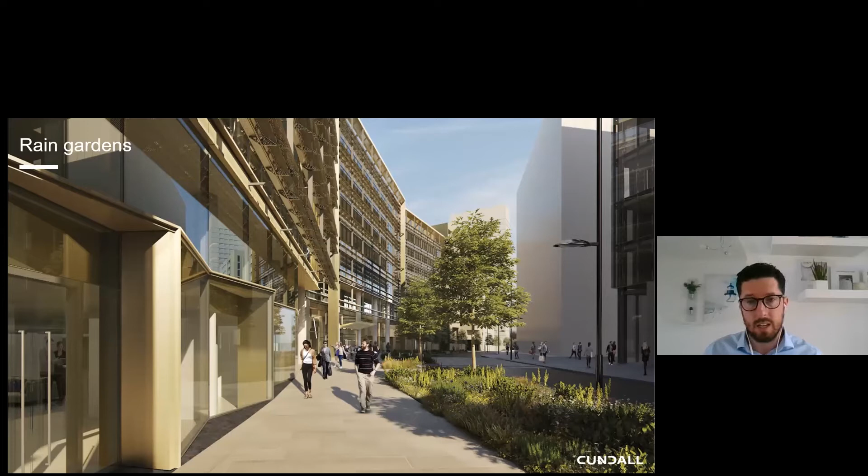Rain gardens are a very simple feature. They can be used in open spaces or in very tight controlled areas, and are simply a depression in the ground where surface water can overland flow into them, or you can direct rainwater downpipes from your buildings into them. They're typically planted with a variety of hardy species and can be really quite attractive features.

Attenuation basins are typically thought of as just big holes in the ground, but they don't have to be. You can incorporate attenuation basins into your landscape and make them very attractive and very usable spaces for the end user. These largely remain dry for the most part, but may have a little channel in the center of the basin to pick up that low flow of water.

Swales are another aspect, not to be confused with attenuation basins, as I sometimes hear. Swales are primarily used for collection and conveyance of water, and they can take very simple landforms in the landscape. It's a simple V cutting here, and they can be planted with a simple verge and maintained as such, or let grow wild, or you can introduce some enhanced planting to really up the visuals. They can be incorporated with underground systems to really enhance the function.

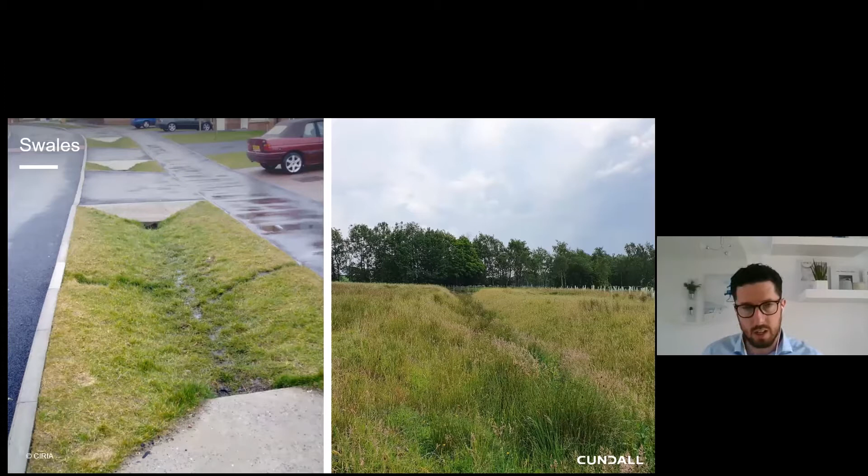Ponds and wetlands are permanent water features and have obvious benefits for water volume control. Plus, they also add a huge amount of biodiversity and amenity uses for the end user.

Integrated constructed wetlands are a bit more specialized. These are typically provided in areas where there's an existing pollution problem or an effluent discharge into an area that's near wetlands. Basically you're enhancing these areas through engineering solutions, natural systems, and soils, so that the inherent systems allow the degradation and capture of these pollutants before it passes on downstream.

Another thing we want to point out on water use in developments is that water really should be looked at as a commodity. Every year, huge amounts of resources are directed towards sourcing, treating, and supplying high quality potable water to our developments. But when you look at what it's used for, a high amount of water goes towards uses that don't need that level of treatment. And the traditional approach to development was to direct the wastewater as quickly as possible to the sewer and away from development, often paying the same supplying company to take it away.

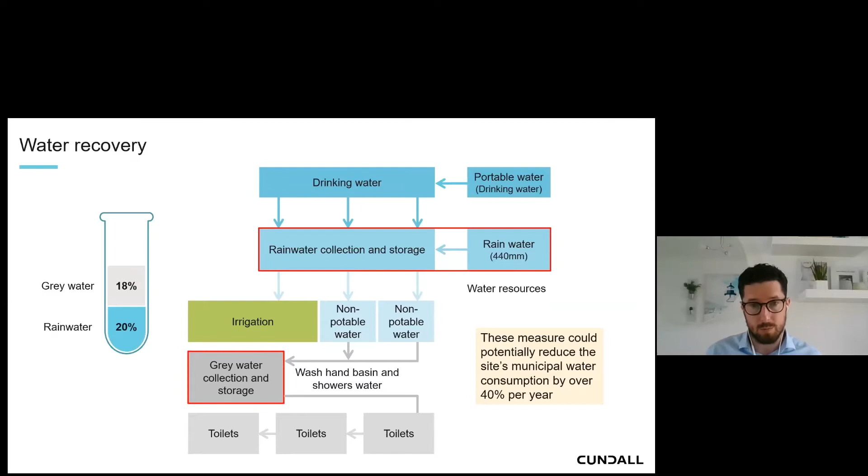Other benefits for blue and green infrastructure is the amenity provision. So we're providing more green spaces for people. They're more attractive, more well-being aspects, and also it can provide for food production.

So why is blue-green infrastructure on the agenda? Many of you may have tuned into some of our previous webinars, particularly last week's on climate resilience. And from the discussions about that, you can see that through climate change, flooding is just going to increase into the future. Studies and results of data collection over the last few decades have shown that it's getting wetter on average. The Met Office in the UK has recorded that the last decade is 1% wetter than the previous 2 decades and 5% wetter than the previous decades before that.

The UN's Intergovernmental Panel on Climate Change has projected that the UK's storm intensity is going to increase 10% year on year up to 2100. And this obviously has other implications, particularly when sea level rises are occurring as well. In the UK, the sea level has risen by 17 centimeters in the last 120 years.

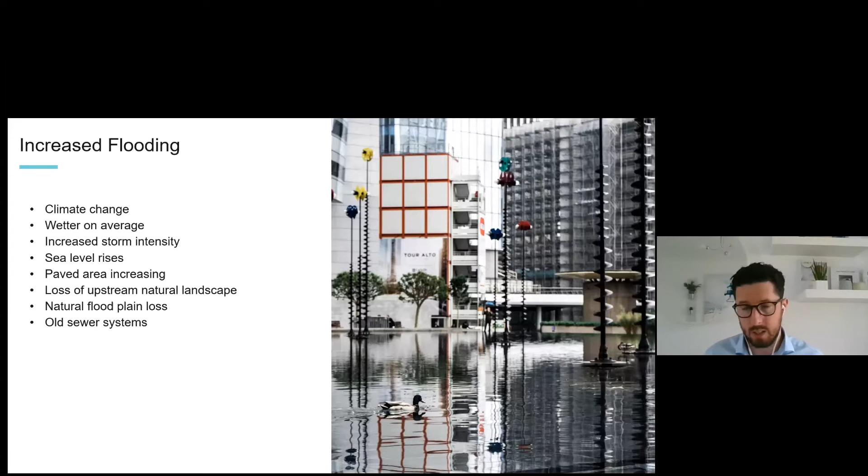Also, we've got an increase in drought and water stress. So in the UK, we're seeing hosepipe bans quite regularly occur now. In Australia, there are areas that used to have drought occur once every 20 years. Now certain areas are almost in constant drought. And this has been shown earlier in the year by Australia's terrible wildfires.

Also, it's been long recognized that our cities are being overpaved, which is interrupting that natural water cycle, preventing that natural infiltration into the ground underneath the city areas, and this is having a number of effects. So it's interrupting the replenishment of the groundwater aquifers. It's also drying out soils, and certain soils then shrink, and this has big impact on foundations in places, but also can actually contribute to the whole city area actually sinking.

Biodiversity is another big problem, and it's an increasing problem across the globe. Extinction is being talked about heavily for a lot of animals. In fact, in the UK, 15% of species are threatened with extinction. This is also compounded by a general reduction in the abundance of all species out in the environment. And another thing is the bee population collapse has been widely reported, and this is a huge ongoing problem. In fact, the bee population has dropped by a third since 1980.

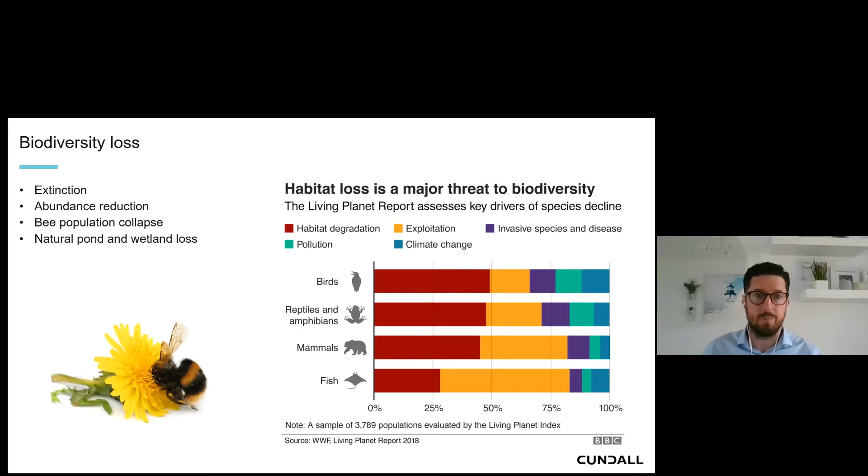Air pollution. The WHO considers air pollution to be the greatest environmental risk to human health, with over 90% of the human population living in cities where their health guidelines are being exceeded. And in the UK, this contributes to roughly 40,000 deaths, and also adds about £20 billion of cost per annum.

But actually, good news: in developed countries, air pollution has generally been on a decline. There are still problems in the cities, where NO2 and PM levels remain high. Developing countries are struggling with this, and these problems are being compounded by the increase in hot and sunny spells, which stagnate the air, hold it in the cities, and add to the general air pollution.

And then we've had the increase in wildfires, as I mentioned earlier. So there are days where smog is blowing across the cities, causing real problems for people with respiratory illnesses. Also, the general heat of cities reacting with these air pollutants can have the effect of increasing ozone.

Contamination in the environment. So we are aware of contamination in the environment. We're particularly aware of historic contamination from industrial sources, mainly in the form of hydrocarbons and oils. Plus, recently, we've been made more aware of how plastic is impacting our environment.

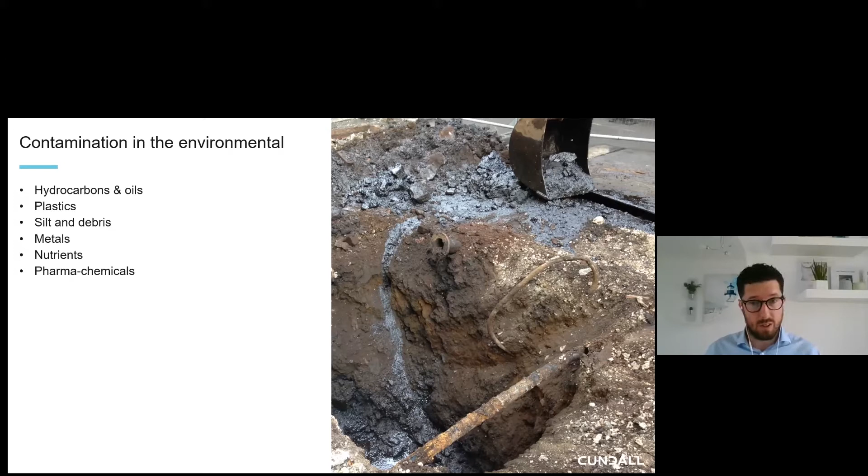There still remain a lot of other contaminants that we don't really think of. Silts and debris being washed downstream very quickly can have big impacts on certain areas. Heavy metals get washed off our roads from cars, etc. Nutrients getting into the water courses can have a big effect. And pharmaceuticals are now being understood to have quite a large effect on wildlife.

Urban heat, another big problem. Our cities effectively have their own local mini climates; London, for example, has recorded an average of 1 to 3 degrees warmer than the surrounding countryside. And this is mainly influenced by a number of factors.

Basically, sunlight has an uninterrupted path through to our cities. When it hits surfaces there, we have metal surfaces that heat up quite quickly, concrete surfaces that store heat and release it back slowly, and glazing that traps and amplifies heat. So there's a lot of heat being provided just from the natural environment.

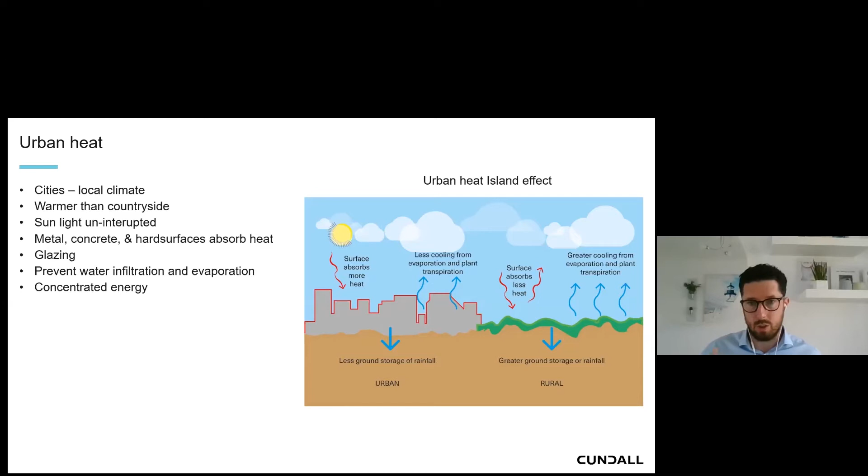Plus, overpaving prevents water infiltration, and there's the loss of evaporation effects, so there's a loss of natural cooling. And also cities are concentrated energy users, so there are a lot of sources for urban heat. And this only leads to solutions such as increased air conditioning, which means increased energy production, which only compounds the climate change we mentioned previously.

So what has been done about it? You'll be aware there are a lot of discussions around sustainability in the international community. The UN has set out its Sustainable Development Goals, and Cundall has been involved in lots of talks around these and tries to promote them in everything we do. You might be able to tune into some of the previous webinars to look at our thoughts on these. The UN Sustainable Development Goals are there to achieve a better, more sustainable future for all.

And blue and green infrastructure actually touches on 9 out of these 17 goals. Other international influences, like the EU, have adopted a sustainable development strategy, which has become a basic objective in everything they do. Any international negotiations and internal policies all get measured against this. It's a good framework for promoting the sustainability agenda among member nations, but also among people who want to work with the EU.

Governments are rolling this out through planning, regulations and policy that you're aware of, such as in the UK the National Planning Policy, the Planning Practice Guidance, Sustainable Drainage Policies, and the National Policy for Waste. These policies help local authorities guide developments so that they meet these national and regional goals, not just for the development itself, but in the wider picture.

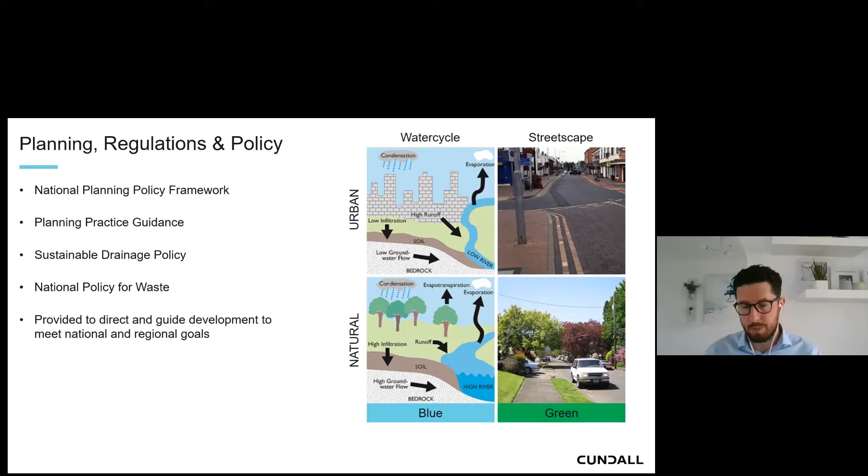And at Cundall, we're getting involved in this. We've been involved with the London Plan that's currently out for draft consultation, and lots of the problems we discussed earlier are major targets for improvement through this plan. One of these initiatives is the Green Grid initiative, which recognizes an interdependent network of green infrastructure and how we can provide benefits across the city region, not just on a local level.

And it recognizes that there are multiple benefits to blue and green infrastructure, whereas traditional methods only deal with one thing. For example, an attenuation tank only deals with water volume, whereas a pond provides for water volume, water quality, biodiversity, and much more. It promotes well-designed, well-managed systems that are interdependent with other systems around the area, so it's not just one site dealing with it and the next one not, but a whole inclusive strategy.

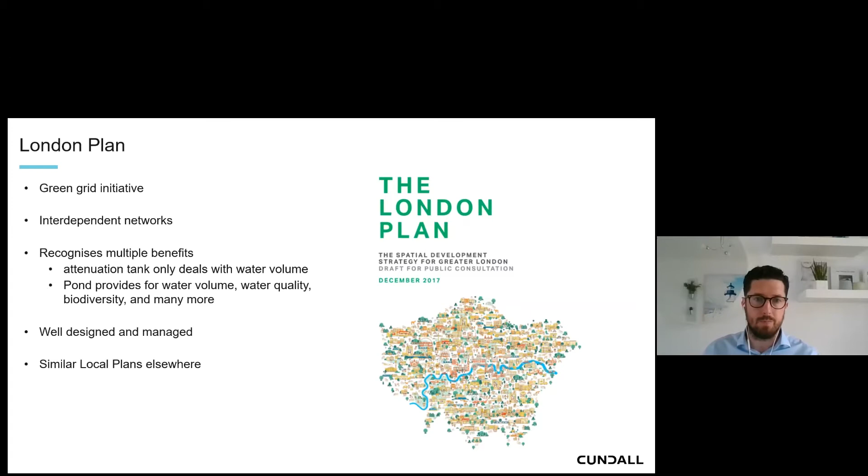And similar local plans are in development up and down the UK, and throughout the world, as this agenda moves forward. Multiple agencies are responsible for the rollout of these initiatives, but in the past, lots of these were set up to focus on one specific aspect.

And that has had its own challenges because they're set up in this traditional approach. So what worked for one mightn't work for the other. But actually, what we're seeing now is coming together. And in certain areas, we had really good success, like in Scotland.

A lot of the agencies are still owned directly by the state government, so they've been able to roll out things quite smoothly. Likewise, throughout Europe. Maybe the rigid structures weren't in place as they are in some other places, so it's allowed them to adapt quite quickly.

In England, we've actually seen a very poor uptake in blue and green infrastructure, and there's been lots of reasons for it. There's lots of systemic barriers in place. Lots of these agencies are quite independent, and some of them are private companies. So engaging with these has been quite a challenge over the last number of years, but thankfully this is starting to change.

So the sewer companies have got involved quite recently, and they've actually unveiled their new code for adoption, which now allows for the adoption of SUDS features. So that'll accelerate the program, hopefully, within the UK.

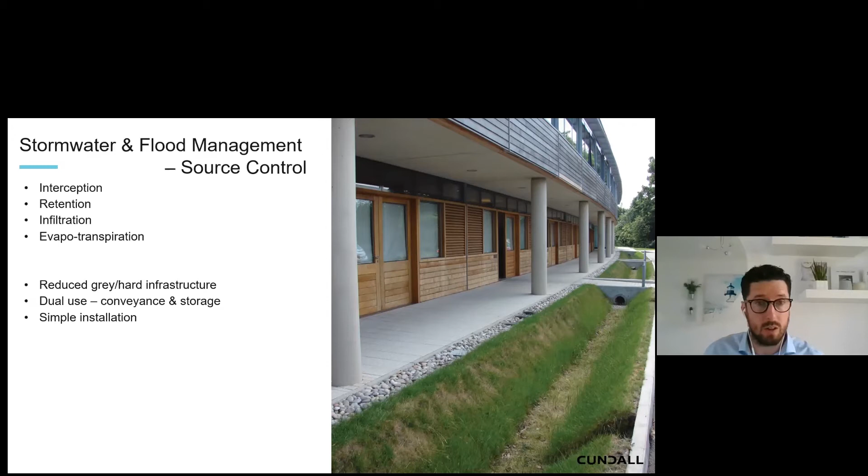But also we'd encourage you to get involved at more of a strategic regional level. And sometimes if we go and speak to local planning authorities, we realize that they're doing some important flood works nearby. And we'd encourage conversations about these, to get involved. Maybe you can offset some of the requirements on your site by investing in strategic floodplains elsewhere.

Also, we'd encourage local or regional wetlands to be identified and protected, because these have huge capacity to deal with floodwater and the like. And these are not just areas that are a waste; they should be used for the function that they really provide. Other things that we try to encourage are to look at upstream catchments where vegetation has been previously stripped, and reintroduce that sort of vegetation cover. And this will give further resilience to the downstream areas where the more developable spaces are.

Clean water is another big benefit of blue and green infrastructure. Simply by passing the water through the vegetation, pollutants are captured within the vegetation, within the soil mass, within the root mass, and this can filter out heavy metals, particles, plastics, silts, and hydrocarbons. And once they're captured, they cannot go on to pollute elsewhere.

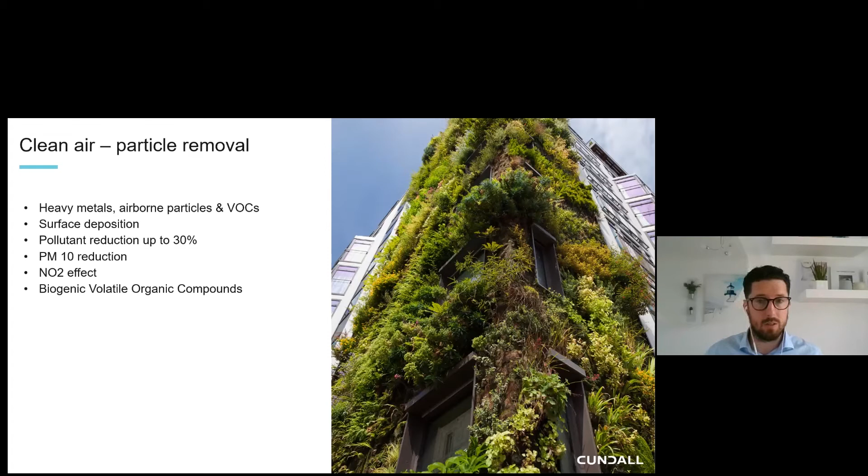And also we need to be careful about which plants we use, because certain plants actually give off volatile organic compounds naturally. Another thing to consider about clean air is that some vegetation might impede the dispersal of air. Some big trees that overhang the space can confine air. So we've got to look at the shape of the streets to introduce the correct solutions, such as green walls in narrow spaces, shrubs and low hedges when it gets a bit wider, and only bringing in trees when you've got a widened space.

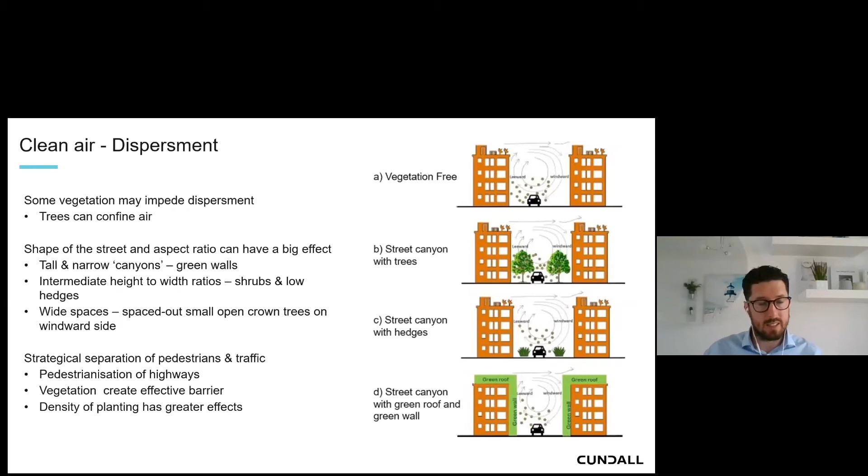There are better ways to do this, looking at how we can segregate the pedestrians and the traffic. Examples are pedestrianization of the highways, or creating barriers between the road and the pedestrians. And one thing to note is that consistency and density of planting has a better effect.

Urban heat. So exactly opposite to what I was saying earlier, introducing green infrastructure creates a barrier to the direct sunlight, stopping direct contact with the unnatural surfaces. It provides shading for windows. Also, you've got the evaporation and transpiration effect; just the process of them cools the air. And you're also allowing water to get to the natural soils and infiltrate, further providing resilience to the heating effect.

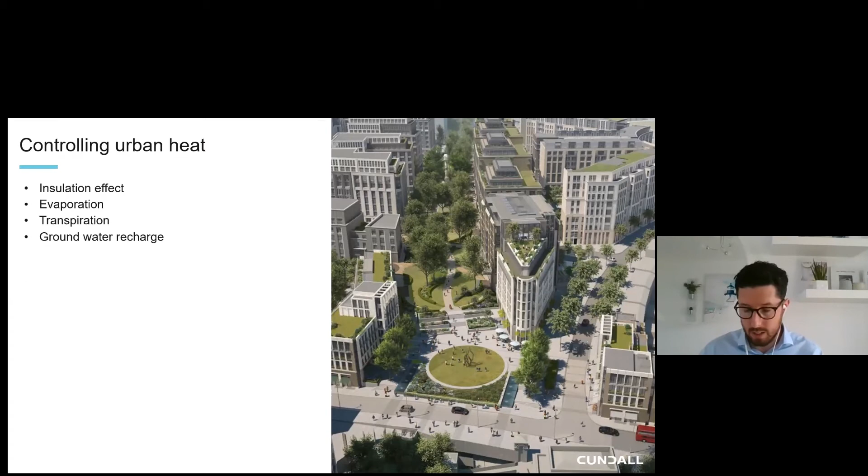So planting has some effect on noise, but it is limited. Mainly noise is influenced by the distance from the noise or the orientation. You can introduce barriers, but where green infrastructure can really benefit is introducing a softening to the landscape rather than having hard surfaces which reflect noise. The soft vegetation actually absorbs some of that noise, so improving noise.

Carbon emissions is something a lot of people look at, planting trees to offset carbon. Now you can see that planting trees has a limited uptake of carbon initially, because you're starting off with a small sapling. It's not until it grows into full maturity that the effect on carbon is really at its best. So it's a long life return on carbon capture, and the same with other forests.

But there are other movements out there. So there's Miyawaki forests, which are dense urban forests, and the 10 times denser planting gives them 30 times more benefits, and they also have a 40 times increase in the carbon captured through the process because they grow so quickly and so densely. And they have an added benefit of being up to 100 times more biodiverse.